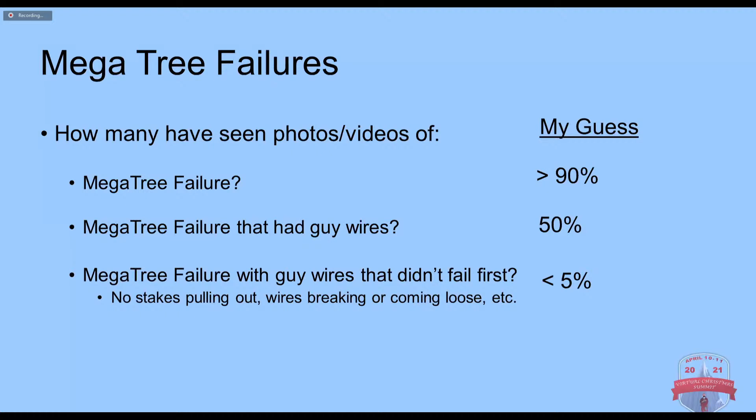So I'm going to get into a little bit of background here, some science stuff that you probably slept through in high school or maybe college. Some of you might have been interested, but not everybody.

I'm going to talk first about capacity and demand. Capacity is how much something can hold. Demand is how much you're asking it to hold. Pretty simple, pretty basic definitions. But we'll look at this as just a cup. A cup over here on the left-hand side, the capacity of all these cups are the same.

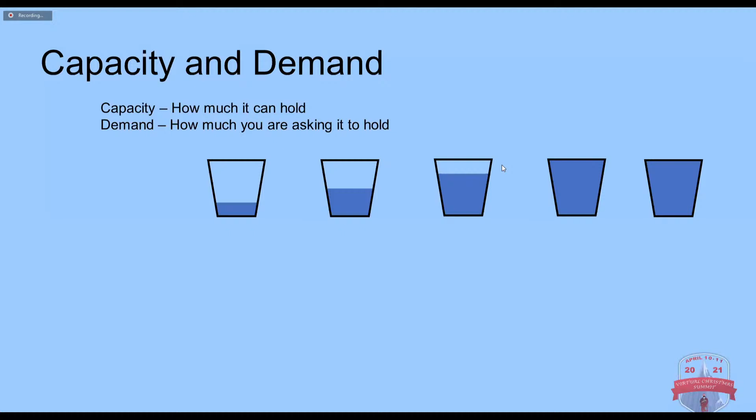The demand is different. As you add more water or fluid to it, it gets bigger. So I'm going to say these are all 1 cup capacity containers. The demand I've increased over here.

I'm going to talk a little bit about either the ratio or the factor of safety. The ratio is just the demand divided by the capacity. And I think I messed that up over here. Factor of safety is when you divide the demand the other way.

But basically what's important here is that you want your capacity to be greater than your demand so things are safe. If you're trying to put 2 cups of water into a 1 cup container, it's going to overflow. That doesn't work. As we go farther to the left, we get better. 1 on 1 just brims the top, and then it goes down from there.

Now, I put in there that it spilled. Where you want to fall in this range is really up to you, I'm not sure where it's going to be. What I'm going to try to show you is that we're going to try to make it closer to this end when we're doing things, but you don't have to be way down here. It's really a personal preference type thing. How much risk are you willing to take?

To go along with the cup analogy, there's 2 different things you can look at. If you have a child that you give a cup to and they're outside and you fill it with water, you're probably not worried if they're right up to the top of the cup there, and your capacity and demand are almost equal. If you give that same child the same cup full of fluid, but instead it's grape juice and it's inside on your nice brand new white carpet, you don't want them anywhere near this edge. You want them way down here, possibly so much that there's barely anything in there.

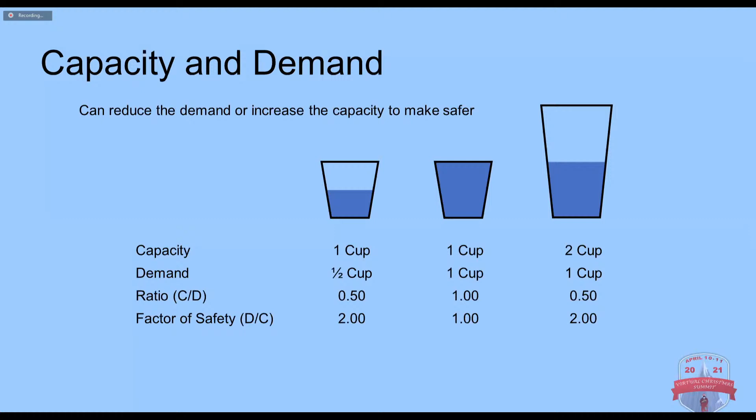So how do you make it more safe? Well, let's say if you got a cup that holds a cup, there's 2 things you can do. You either can put less fluid in the cup or get a bigger cup. When you do things like this with mega trees, it's a little bit strange because you can't really reduce the demand. You can't say, well, I'm just not going to have any windy days. That is not possible.

So what we're going to do is try to increase the capacity for the most part. But when you do add the guy wires to it, it actually reduces the demand, as if we were going this way on the pole. We're trying to prevent the pole from failing, not necessarily just protect the megatree as a whole. So we're spreading the load. We're going to be doing a little bit of each of these. I just wanted to cover that so you see there's a difference in what we're doing - sometimes we're changing one thing, sometimes we're changing the other. But in both cases, either way we do it, we've made our factor of safety better, and that's what we want to do.

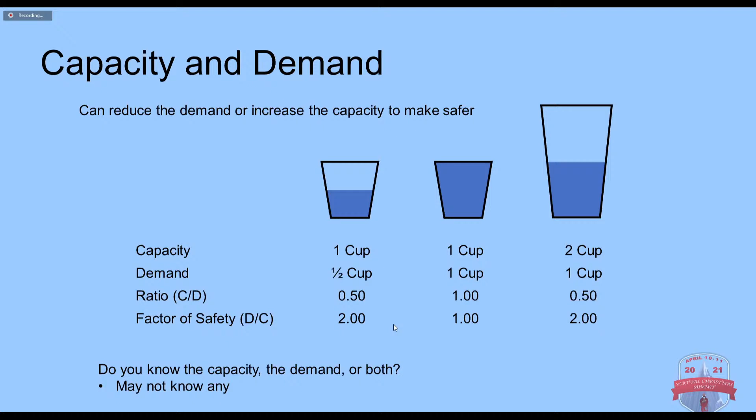So do you know the capacity, the demand, or both? When you're designing a mega tree, you probably don't know either one if you're not an engineer, which is fine. But we're going to give you some information on how you can figure that out.

Guy wires are a lot like a string on a balloon. The string is going to break at some point - that's its capacity. The number of balloons you connect to it is how much force goes through that string. The capacity is not a real force, it's just the maximum force you can put on there. If you have one balloon, it's maybe pulling up 1 pound. If you had a bunch of balloons, it might pull up 10 pounds. Even though the string at the bottom can hold 10 pounds, it's not pulling down on it until all of those are there.

So capacity is a little bit strange in some respect, but again, go back to the cup. The cup has a capacity to hold a cup, even if you only put half a cup worth of fluid in there. So hopefully that makes sense.

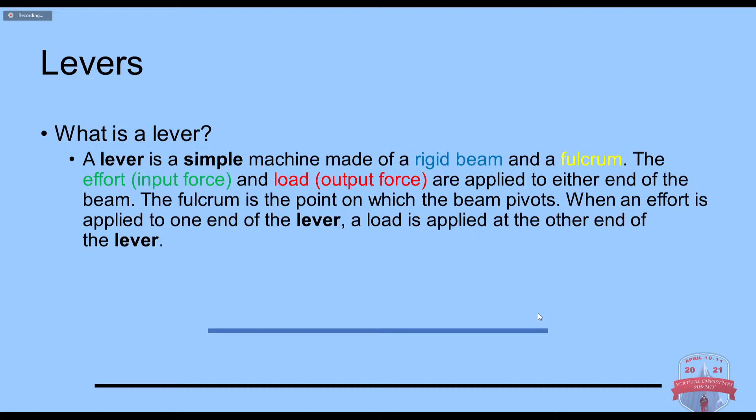So I'm going to talk a little bit about levers here - going back to some high school things you probably learned and forgotten. A lever consists of several things: it's got a rigid beam so you can move it, a fulcrum where it pivots, and some effort force that you put on one side and output force on the other side.

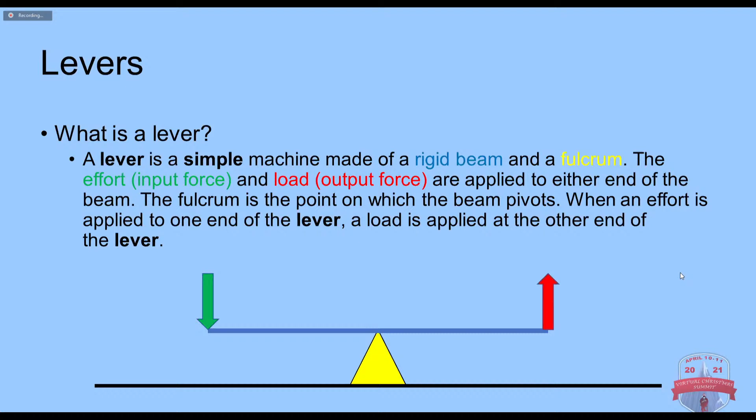Our megatrees are going to act a lot like this. I'm giving you this background as to why this helps and how our guy wires are going to assist. Most of you have seen something like this at a park at some point, maybe even ridden it.

So using our logo, let's put 2 Bernies, one on each side. They're twins. Does this move either way? No, it doesn't. Why not? Because they're both equal weights, and they're both equal distance from the center.

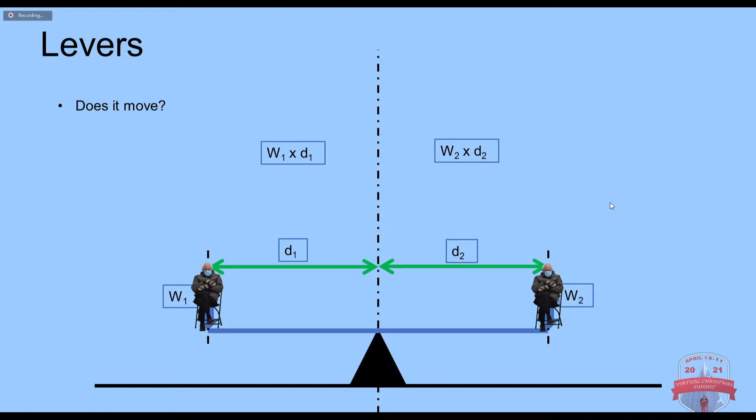What's important here - nobody's going to be tested on this - is the distance from the pivot point to where the load is applied, multiplied by the weight of the load, determines how it moves. If these are equal, which they are here, say he's a 100-pound Bernie 3 feet away, these forces are equal. That means it's in equilibrium, so it doesn't move - it stays perfectly still. If somebody lifts up or pushes off with their feet, it moves, but if you just balance out there, it's not going to move whatsoever.

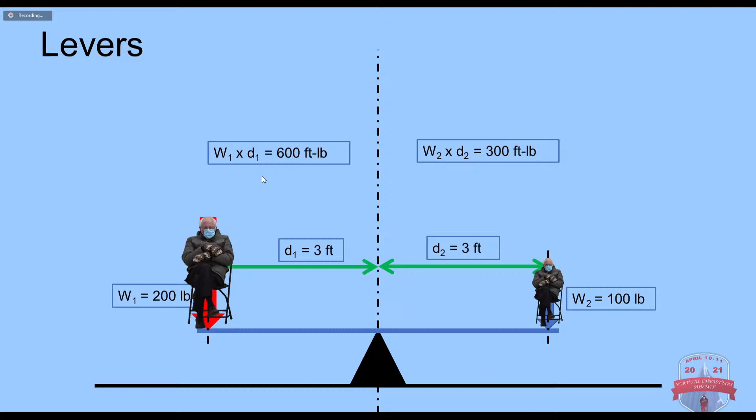If we have a bigger Bernie on one side and a smaller Bernie on the other side, what happens? The distance stays the same, but the weight on this side increases - this side is now bigger than that side. I'm sure everybody knows what happens: it pushes down because that number is bigger than the other side, and it tips and goes down to the ground. The other side, you'd have to add more weight to get it to come back up.

If you've ever been on one of these at a park with a little brother or sister, or were the little brother or sister, and had the one heavier on one side and lighter on the other, this was never fun to play with - one was always in the air and one was just sitting on the ground, holding them in the air so that they would scream and yell.

So why does this stop? It stops because it hits the ground, and the ground is our reaction. With megatree poles, which I'll show you later, we don't want the ground to stop our megatree from tipping - we want to stop it before it hits the ground. Hitting the ground is a bad thing; that's what we're going to consider a failure.

But once the ground is acting on it, this goes back into equilibrium because the ground reacts with the force necessary to put it back in equilibrium. The ground is never going to push up more than the load being applied to it. If the ground could do that, as you're walking down the street, you would suddenly fly into the air. The ground exerts a force, but it's a reactive force, not a pushing force.

This basically just shows, because we have 100 pounds on this side and we're reacting at the same on the other, the 200 pounds here, we just take the difference of them and we have the 100 pounds pushing back there. Again, showing a little math for those who might be interested. I realize a lot aren't, but this does build to what I'm getting at later. To understand this is important.

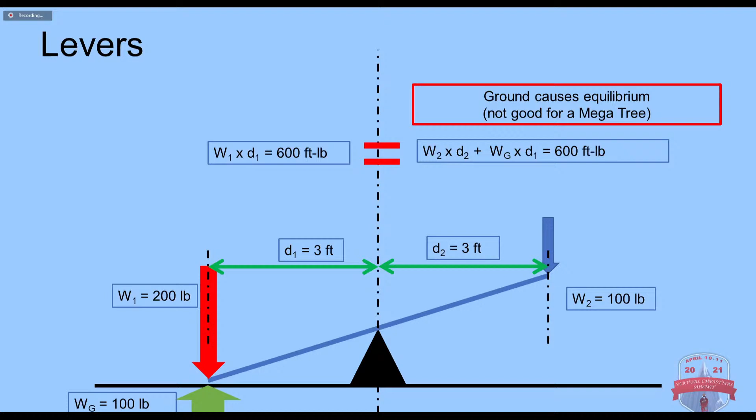So again, the ground causing equilibrium is not a good thing for a megatree with the pole anyway. With the base, that's fine.

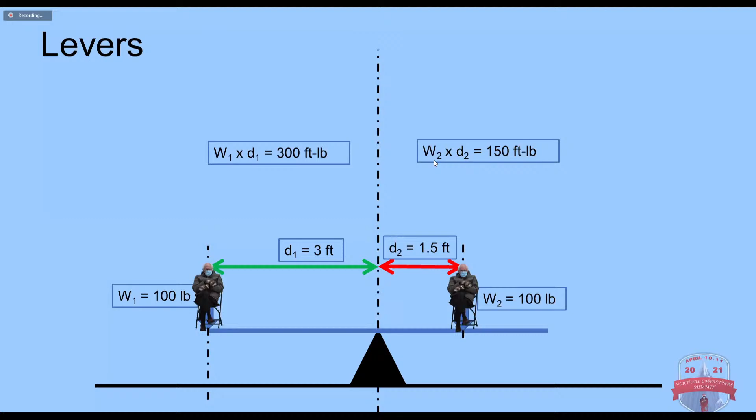So let's say we've got our 2 Bernies, 2 same size Bernies again. We're moving them up and we move the one in a little bit closer. What happens there is we're changing the distance. Let's say we made this distance half away from the pivot point as the other side. Still the same weight, but if we take the weight multiplied by the distance on one side, and the weight multiplied by the distance on the other side, these two are again no longer equal, so we're not in equilibrium. We've got the case where this side is bigger, same thing's going to happen, that side goes down and pushes down.

Pretty basic concepts for the most part. Again, I don't want to bore you with all the details of the math. It's on the slides if you want to take a look at it later on. I'd be happy to share the slides or walk through with somebody. But whenever you have a load imbalance, you get movement until it hits the ground and the ground creates equilibrium, and that's what we're trying to avoid.

Now, you can play around with both of those things to make it happen. If you have a very high force on one side and a small distance on the other, multiplying these two together gives you the 300 over here. Multiplying these two together gives you the 300. If you had this properly located, it's going to stay in balance, just like the first slide that I showed where nothing moves. That's all fine and good. No problems with that whatsoever.

And this is what happens with our megatree. We don't have something up at the top that's holding our wind back. We're going to play with a little bit of the locations and the weights and the forces. Again, that's equilibrium there.

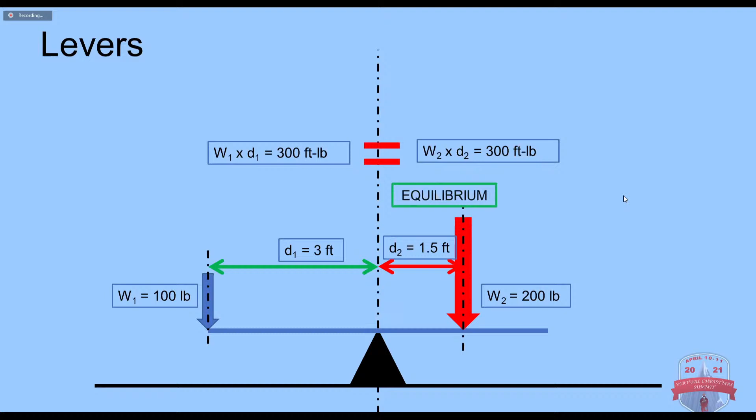And we don't necessarily just have to have one load on each side of our pivot point here. We can have two loads on one side, a big load on the other, so they're not equal. They're all different distances. Who knows what's going to happen there? This is where the engineering part of it comes in, because we have multiple loads, multiple distances.

As I said, I've made some assumptions in this, that this piece of pipe here, or wood here that you'd usually be sitting on, a pipe in the case of our megatree, doesn't have any weight, or if it does have weight, that it's equally distributed and not playing into it. There's a lot of things that go into this. This is just to show you some of them. It would get more complicated with a real design, obviously.

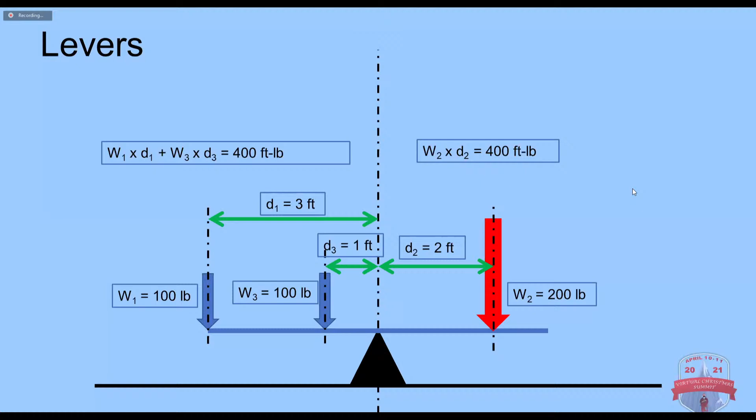So going back to our capacity and demand talk, here you can kind of tell it's a little bit different. The capacity we're going to call over here is the left side of it, and our demand is going to be over on the right side of it. Let's just say we have a situation where somebody gave us a nice Christmas gift, but they stuck it under the one side over here, and we don't know what's in there, so we don't want to crush the box.

So what we have to do is make sure our capacity is going to be greater than our demand, so that this side always stays down or level, and that our demand isn't so big that it crushes the present, just as a sample here. There are several different ways that you can keep that gift from getting crushed.

What we could do is move or put a block underneath it, and that would allow the force that's applied over on this side to go through the block and down to the ground. That's great if you have a real situation like this with a lever. For a megatree, it's not really that practical, so you wouldn't want to do something like that necessarily.

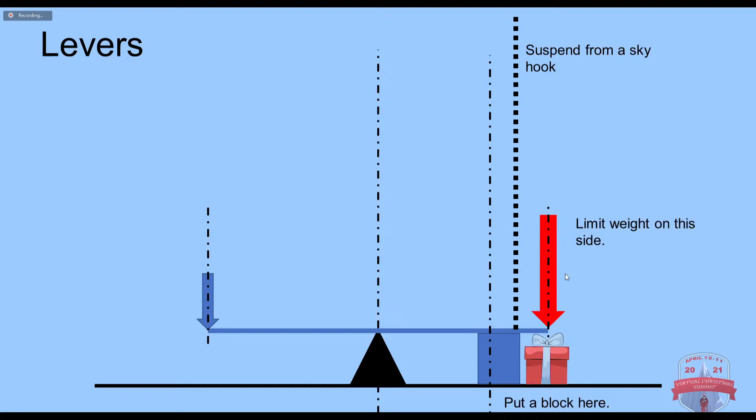Another thing you could do is hook something to the sky to prevent that side from coming down, hook it to a tree nearby, a crane, a sky hook. Again, not really practical, but it is an option. So these three, they're all things you could do, not really practical things. Although this one is somewhat like a guy wire, but not quite. You could also move the support.

Remember I said the distance from the load to the pivot point is what is critical for some of this. So if we can move it so that this distance is greater than this distance, we get more mechanical advantage, so that this load is acting more than this load. That will help us out.

With a megatree, you can do that with the base and when you're positioning the guy wires. Again, I'll get into that a little bit more, but I'm just going through some options here. We add more weight to this side, then we can help guarantee that the weight will be more than it is on this side. Again, we can't control what this is going to be, but we can guess what that is going to be and put a lot of weight on that side. Or we can put a chain here down to the ground that would prevent this side from going up and tipping over.

So what does this have to do with a megatree? I talked a lot of information there that probably had nothing to do with anything, but it gives you some background information, because the same basic principles apply to a megatree. We're just looking at clockwise versus counterclockwise instead of just up and down with a pivot point. Our rigid beam, when we're talking about a megatree, is the base and the pole for that.

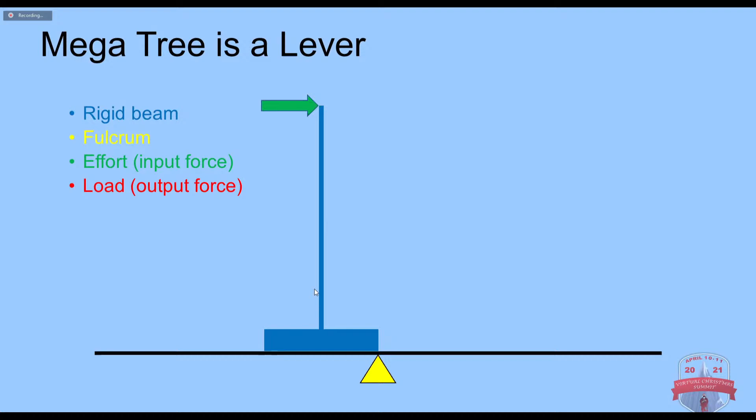The effort, I'm going to call the input force. That's our wind blowing up at the top of the tree. I'm going to assume nothing's blowing down here, or if it's blowing on the strings, because they're connected at the top, at least some of the load's going to go to the top. And our load is pretty much the weight of the base and the weight of the pole itself. This is without guy wires, and I'm going to walk through that first and then show you how guy wires help keep that in line.

Again, as I said, the names are a little bit different than what we would be looking for, and we're looking at clockwise versus counterclockwise as opposed to just what side of a park thing or seesaw tips either way. So if I have a megatree here with a load on it, no wind acting on it, is it going to fall over? I think everybody can pretty much look at this and say, no, it's not going to fall over.

All of my loads here are acting. If you take it based on this point here, you look at them, they're all going to try to make a counterclockwise moment. The ground here is going to react, push back up. The tree's not going to fall over. We're all fine and good.

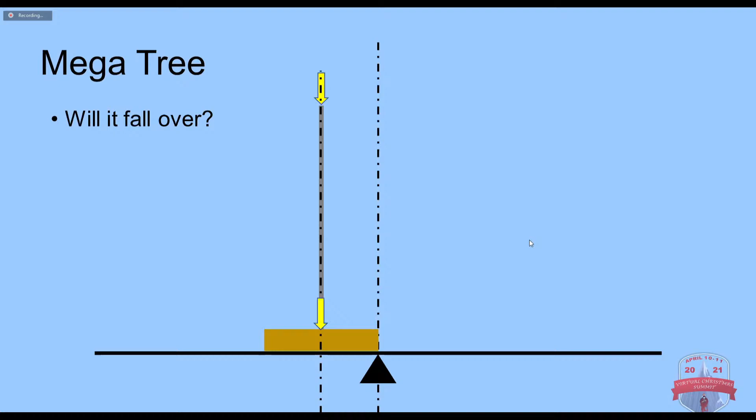I put some loads on here, again, just for the math and for completeness so you can take a look at it. I don't know how realistic these are, but they seem relatively reasonable. The distances here are based on the Monkhouse portable pole, so that's why it's not quite a foot, just to make it somewhat realistic.

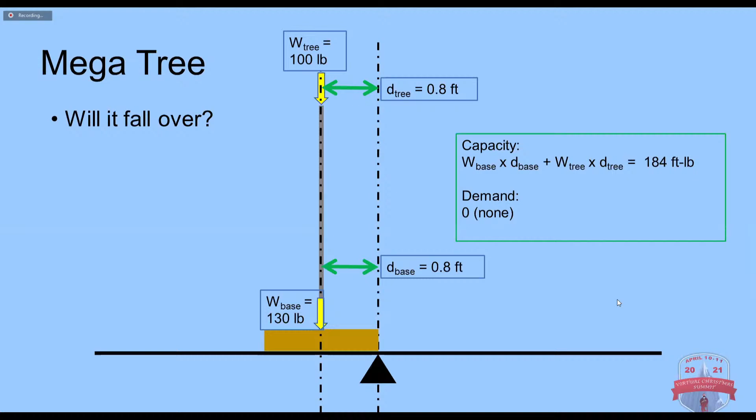So it's not going to fall over there. We have no demand, no wind at the top. Our capacity, taking the distance times the weight, if you do the math, it works out so that capacity is much greater than the demand because there's no demand. We're good, we're happy. But there's no wind, that's not really realistic.

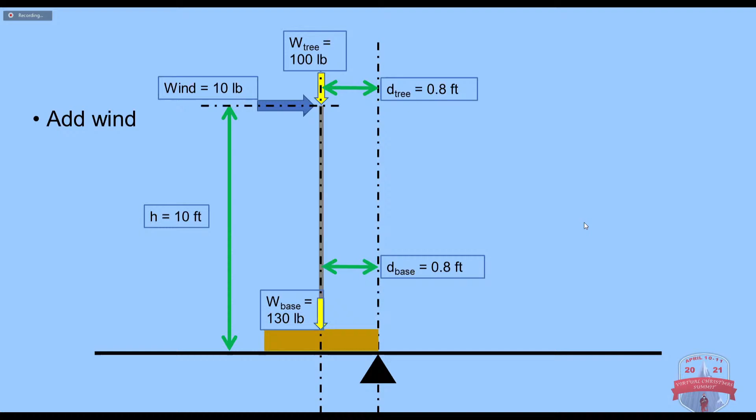So let's add some wind in there. If this is a 10-foot tall mega tree and we add just 10 pounds of force up at the top, which if you have a big topper or a big star on there, is not an excessive amount of force to be blowing at the top, it changes things quite a bit.

Because this 10 feet is so large, even though this load is that small, we get 100 foot-pounds, and a foot-pound is just a measure of torque or desire to try to tip. It went from 0 all the way up to 100 just by a little bit of wind blowing. We're still having capacity much greater than our demand, but we got close very, very quickly with a small amount.

If this moves a little bit because of the wind blowing like that, or if things are offset and this rotates and decreases this amount from that pivot point here, the base down here is still pretty much the same. But once this started to move the top over, it's become less here, which decreases one of these numbers, which decreases what we have here.

I also increased our wind load to 20 on this. Going back one slide, in this case here we have more capacity than we have demand, so it's not going to tip the pole at all. It's not going to make it move over. It may bend the pole itself, but in theory it wouldn't tip the base.

Once we get it up to a 20-pound wind, what happens is this tipping force gets greater than this, and the mega tree starts to want to tip over. The entire thing's going to start to move.

Luckily, wind is not a constant type thing, and you don't get 20 pounds all at once. It usually builds up to that or comes up to that, and then it goes away. It's a very oscillating type thing. The problem with that is we don't know how long it's going to last.

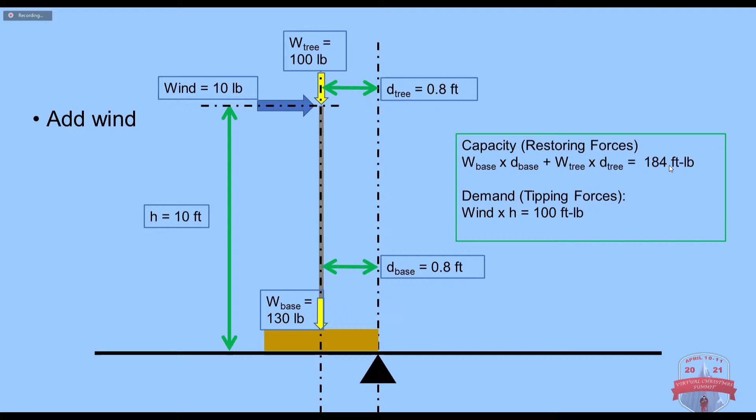As soon as the wind starts blowing, it starts moving it, it starts to tip it because the tipping force is greater than the restoring force. It moves over, this gets reduced. If you remember on the previous slide, it was 184. Now that's dropping down to 104 because this load over here is getting closer to our pivot point.

That's not a good thing. That's not something we want, and it's going to start to tip more. Eventually you get to the point where it passes this pivot point when it's bending or moving like that. Now, instead of this force up here at the top and all that weight helping to keep it in line, it passed this pivot point, and it's now starting to want to turn it over more than it's helping.

So once you get past a certain point with your movement like that, your tree is not going to come back, because this load here, your load on it from the wind plus the offset here, is greater than this. There's no way that this can come back. It's going to fall over at this point, and this is what we want to prevent.

If you get to this point, there's nothing you can do to help yourself there. The weight at the top, pretty much once it passes that point, goes from helping to hurting. You never want to be in that situation.

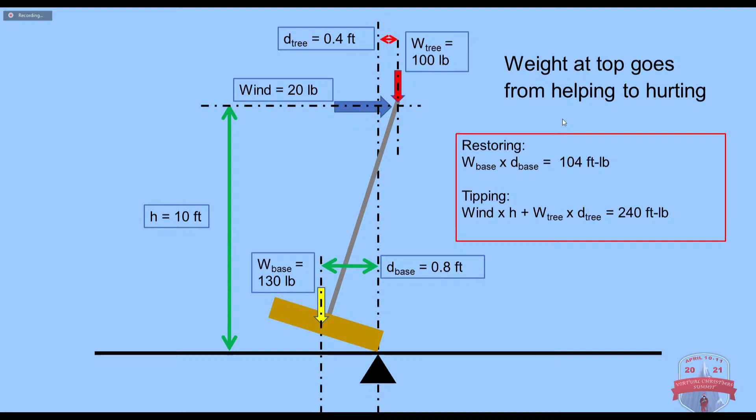There will also be a point where even if the wind stops, like the wind blowing in the last one, if it blows over and I've got it about a foot past, if you get to that point, even if the wind stops, your tipping load from here is so far out that it's pretty much identical here.

But there is a point where once you go over that, the weight of the pole itself is just going to tip it over. I think that's pretty much common sense with a lot of things: you push on your pole to a certain point, and it's just going to tip over and not stand back up. You can do that even without the wind.

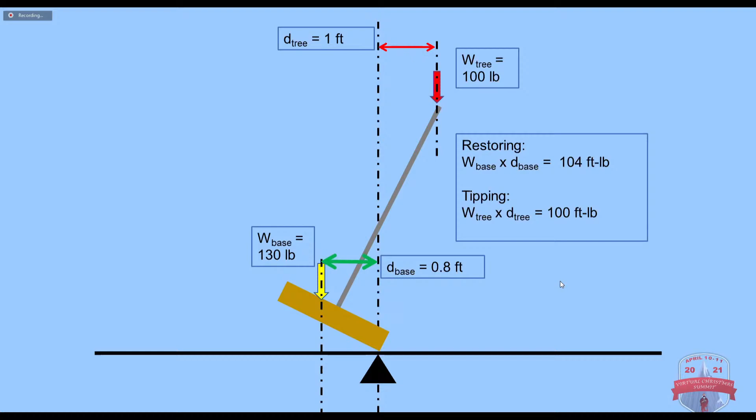So at this point, even when the wind stops, that fell over. So am I ever going to talk about guy wires in a presentation on guy wires? Yes. But again, keep in mind, this is an example only. Do not base the size of your guy wires off of this. I'm just using some theoretical things to try to give you some background information on that.

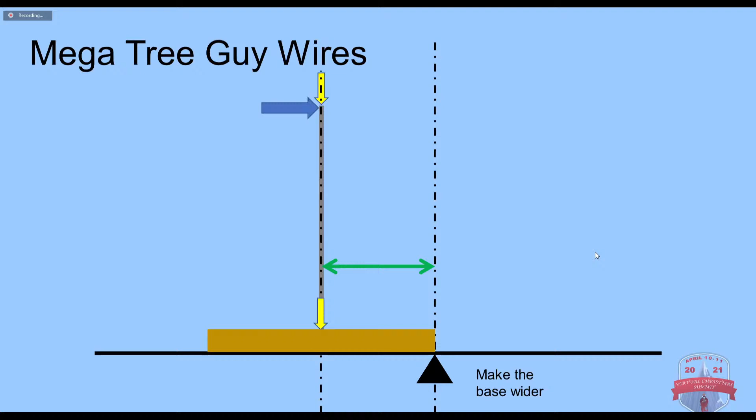So if we put guy wires, what do we get? This looks a lot like what we had before. You could make the base wider to move this over if you're not adding guy wires. This increases this distance, makes your tree less likely to fall over. All fine and good if you want to do that.

You could add more weight to the base. Making it bigger usually adds weight, or if you're not doing a portable hole, you can put it into the ground and that will help, or make it really, really large. That'll help. You could tie your base to the ground, which is what the ASAP pole does. It's got all those little holes on it, so you can do that.

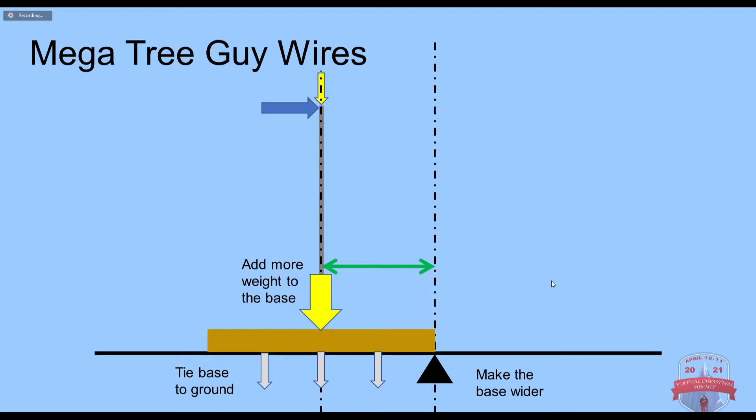Or you can add guy wires. All four of those will help to keep your tree from tipping over. I prefer the last one, which is the guy wires, but all of these are valid. And actually, if you use all of them, you'll be even safer. So it can't hurt to do that.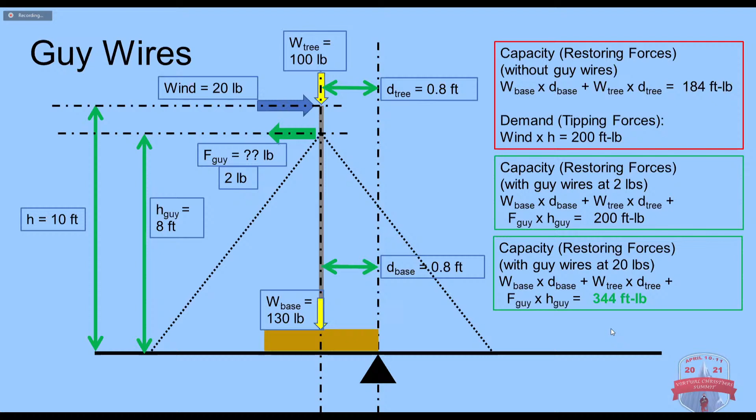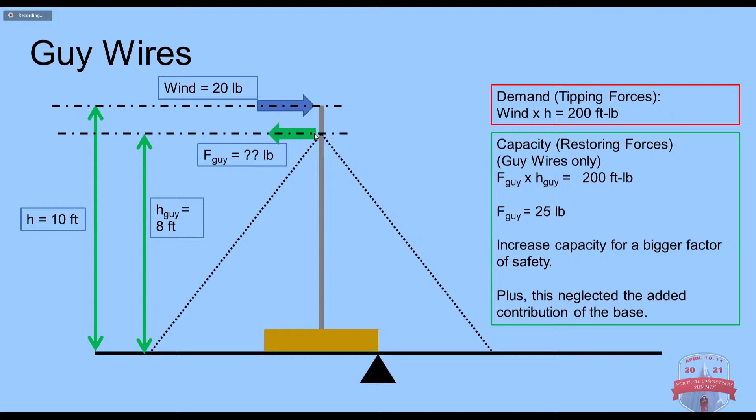And if your guy wires can hold even more load than you're expecting here, you're going to be even better. This is where I was talking about a 25-pound guy wire at this location. You don't even need to account for the weight of your base, the width of your base, anything like this. This is going to stand just based on the guy wires being able to take slightly more load than the wind at the top, because I'm putting them up at the top of that.

One thing to consider is when I was talking about those loads being horizontal force, depending on the angle that your guy wire makes to the ground, it can go up considerably for the actual force going through the wire. If you're purely horizontal, they would be identical, but as you go more vertical, this starts to skyrocket.

If you were perfectly straight up and down, it doesn't help you at all because it theoretically goes to infinity. Where you want to stay is usually around 60 degrees or less, so that you're only doubling the load. Once you get over that, it's really not helping you too much.

So try to keep your guy wire anchors as far away from the base as you can. Realistically, it's not possible to go way out to like 15 degrees. You're going to be close, but try to keep it under 60 degrees so that you've got twice the height to the distance away.

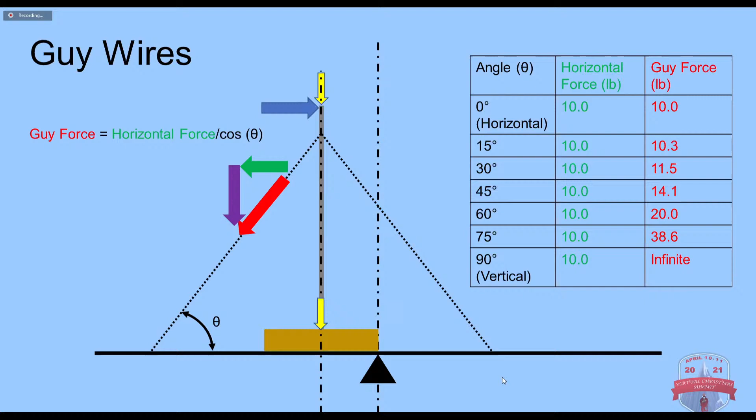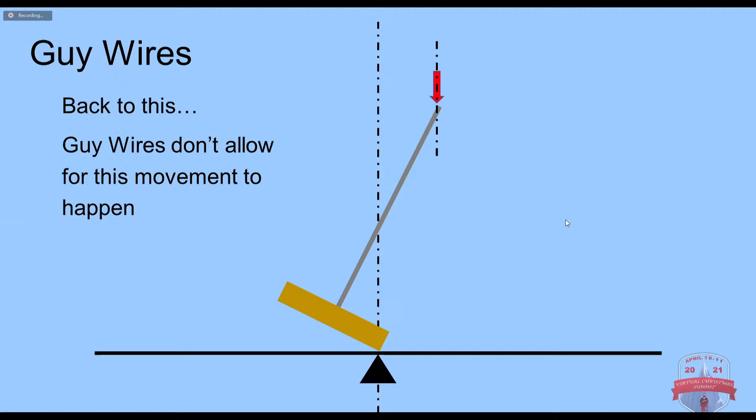So we're going back to this tipping. How do guy wires help this? Well, guy wires first don't allow this movement to happen. In addition to taking the load, they don't allow this movement. If the top can't get off of that pivot point, it helps you because we're keeping it way over here. You can't get into that situation where things are going to fall over.

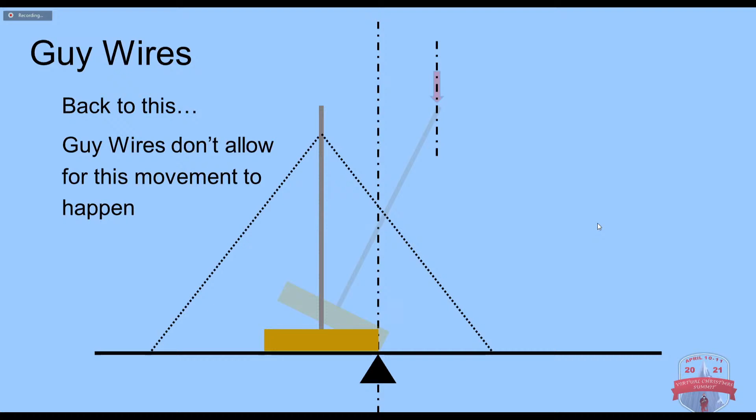I did see a comment in chat about how you calculate the potential wind force of a particular wind speed. I'd recommend watching Walter Monkhouse's presentation from a couple years ago. He goes through some formulas and simple things there. I don't want to redo what he talked about, he covered that very well. It's based on how much area you have as well, and wind speed for the force. So there's more to why guy wires help here that I'm going to go into.

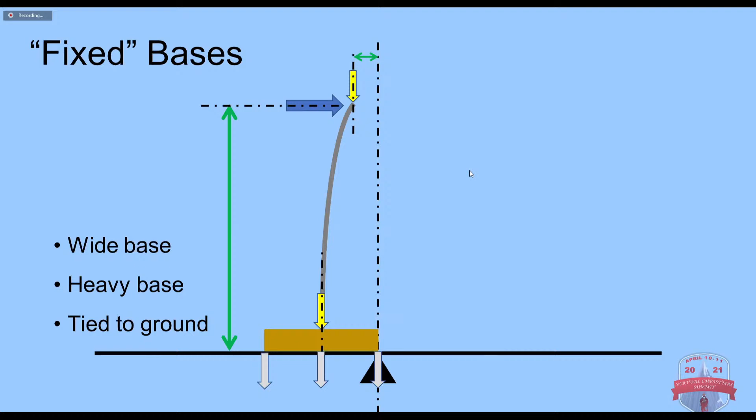Tipping is one big thing, but let's say you have a nice fixed base, nice wide base, tied to the ground, perfectly done ASAP pole. You still have a pole sticking up that, if it did not have guy wires, when the wind blows, it tries to tip it over and it bends.

So the amount that the pole bends depends on the stiffness of the pole, and I want to point out that stiffness does not equal strength. It can if it's the same material. So if you have a steel pole, for example, and you get a bigger diameter pole, then yes, you're going to have it stiffer and it's going to be stronger.

But when you start looking at different poles, if you were to use PVC, or some type of composite material, some of those things are actually stronger but more flexible. So they can take a lot more force, but they're going to be moving all over the place, and that's not necessarily a good thing.

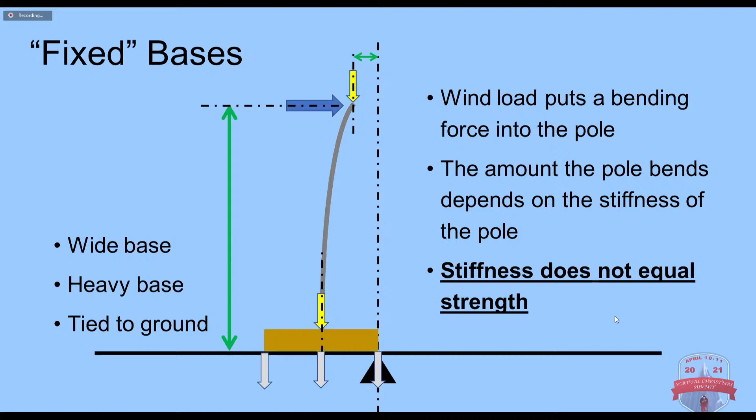Some people will look at it and say, well, the top of my pole isn't moving at all, I'm good to go. Well, only if you have enough strength in what's standing up there. So keep that in mind, they're not always the same.

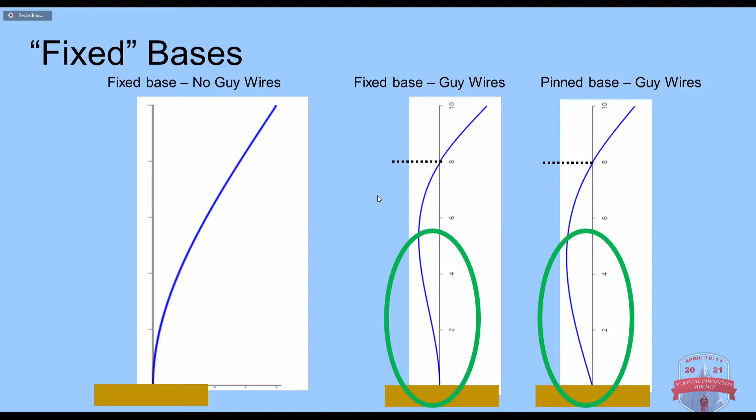That's just not practical. So what these slides I'm going to show here are talking about is the amount of bending that is going to be in the pole of your mega tree. What I'm going to show here is a couple of different situations for different heights. This is not the guy wires on the tree—this is a measurement of how much bending we have in the pole of the tree. So it's measured in foot-pounds. That's just what we use because it's bending, and that's what it's counted off as.

But if I have a 5-foot tree, what's going to be happening is it's coming at the top—there's not much bending. As you go down a little bit more and more, it's that same thing: it's the amount of force that we talked about previously times the distance up to it. So if we have 100 pounds acting at the top, as you go down a foot, you'd be at 100. 2 feet, you'd be at 200. All the way down to the bottom where you have 500 foot-pounds of force in that tree.

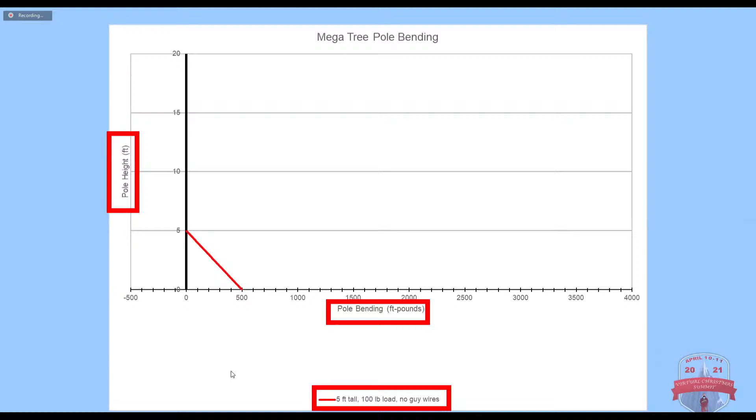If you double the size of that tree—like I said, there's the pole height, the bending—we're starting off with a 5-foot tall, 100-pound, no guy wires installed on this. This is a measurement of where that would be. If we double that to 10 feet tall, it pretty much doubles everything. You're starting at 10 feet, still starts at 0, follows the same kind of direction here. When we get down to the bottom, we've got 1,000 foot-pounds of force in there. As you double again up to 20 feet, it just doubles. It keeps going, gets bigger and bigger.

If we were to double the load on the top so that instead of 100 pounds we have 200 pounds, this skyrockets to 4,000. These numbers may not mean much to you, but what I'm trying to show here is every time you increase the height or increase the load, there's a proportional response at the bottom of your pole that you're getting more and more demand on, and you're not increasing the capacity of your pole when you do that. So you're getting more and more likely to fail every time you do that. And a lot of these ones that have the threads at the bottom, that's a weak point—that's where it's going to rust, that's where you've taken away material. That's not where you want your highest load to be. So this gets very bad very quickly when you do things like that.

And this line here—let's say I picked a pole that had a capacity of 800 foot-pounds. With 800 foot-pounds, I can do a 5-foot pole. When I get up to a 10-foot pole and I cross this line, anytime one of these lines crosses this line here, it means I have less capacity than I have demand, and the pole is going to fall over. So if I had something that only has 800 pounds capacity, I can't do a 10 or 20-foot pole, or if I increase this load up at the top, it's going to fail.

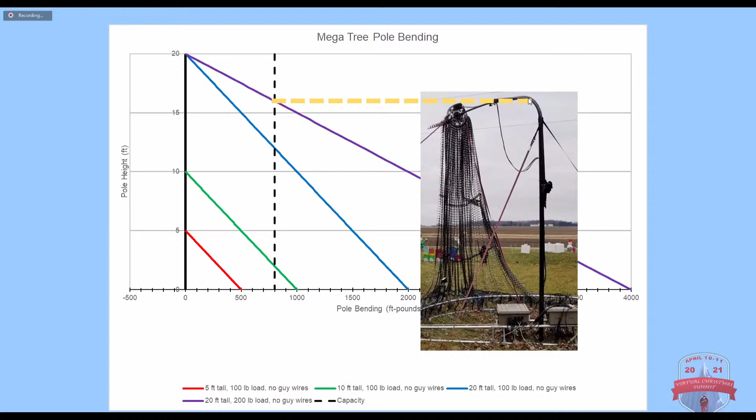Here's an example of showing where things are going to fail. If this pole here, and I don't know how tall this is, I'm just using this for a demonstration purpose, they had guy wires down here at the bottom but nothing up above that. So what happens is when this load here crosses that line, it would pretty much be acting like it was at this point.

It forces it to bend, it forces it to want to fall over. Another example here, this one was before it was set up, during the assembly process. The capacity here meets the demand line, that's where you get your kink, that's where the fail happens. It doesn't happen below this point because this is the weakest point, the weak link in the chain, and it fails before it can get down to the bottom. So this is something you want to avoid. You never want to be crossing this line.

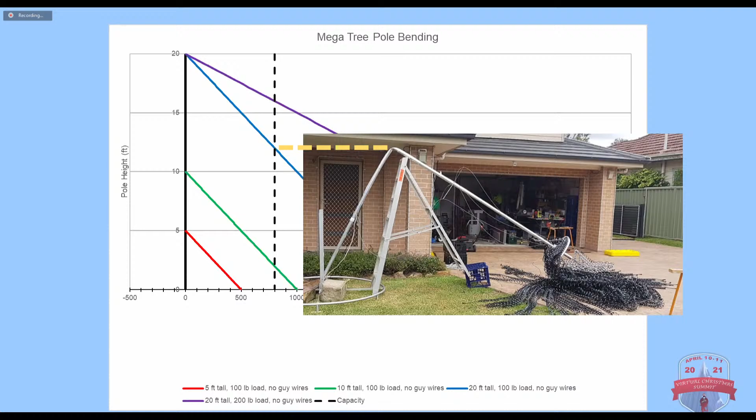Now, not many of you are probably in here because you're engineers and know how to do this, so I don't expect you to actually know where this would take place. What I want to show you is what happens when you add guy wires to this.

So I'm going with a 20-foot pole here as an example, 800 capacity. It looks like it would fail about 12 feet here. You're going to have a problem with this if you designed it this way.

It starts bending the pole in the opposite direction once it hits the guy wires there, or rather, the force starts going in the different direction, and then the bending starts to decrease and turn into the opposite direction. So what happens is at the location you put your guy wire, it stops this and turns it into the other direction.

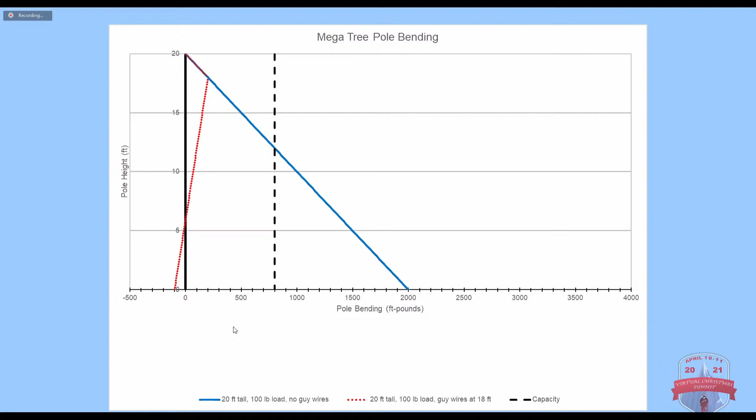You're never getting to this line. You're not even close to this line. Before we were failing, now we're well under this line and we've got plenty of room, factor of safety to go in there. And a higher factor of safety is always better.

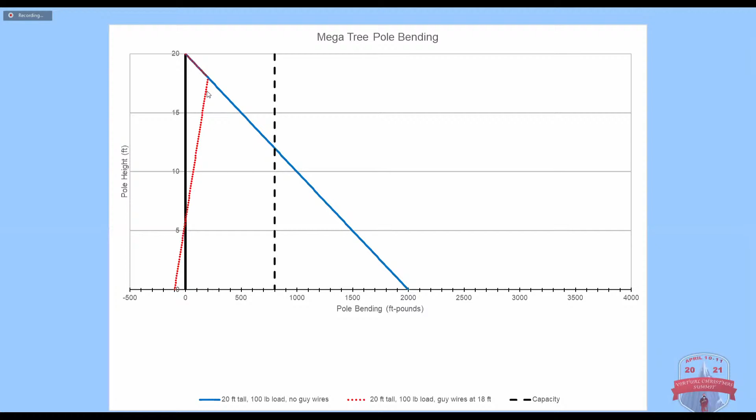So the more important part of this is that the guy wires need to hold. You need to make sure they're installed properly, that they're not going to snap, that they're not going to let go, that the anchorage into the ground is not going to pull out with any force that goes on them. Because if we're counting on those guy wires to pull this down, we know we only have this much capacity, and without the guy wires, we're going to need this much capacity. If the guy wires fail and it comes down and hits here, the whole tree has failed or it has tipped over. If you're counting on it to come down like this, you need to make sure those guy wires are going to hold.

If the guy wires fail, you reduce the capacity, you increase the demand, and you're more likely to fail. Keep in mind, it's not a guarantee that you're going to fail if you don't have the guy wires. Everything I went through here is basically to show that guy wires are helping you. It's not to say you absolutely 100% need them on everything, but they're relatively cheap insurance you can add to make sure you don't get into a situation where it tips over.

If you want to make a bigger base and use a 6-inch diameter pole for the center, you probably don't need guy wires. The problem is most people aren't doing that. We're using relatively light bases, poles you can pick up at a big box store that are like 1.5 inches in diameter or something along those lines. They're really not designed to be taking that much bending force. They're designed for other applications - we're just using them there.